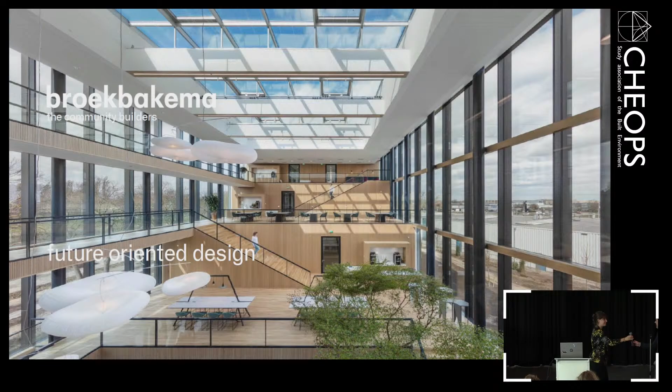Thanks, can you all hear me well? Yes? Hi, welcome, I'm very glad to be back here actually. Once I was a student here, just like you, so I'm really excited to be giving this lunch lecture today.

Today I'm going to talk to you about our office, Broekbakema. We are a Rotterdam-based office, and our motto is that we are the community builders.

Because that's what we like to do. We like to build communities, contribute to the communities in our buildings, and make sure there are enough locations to have social interaction.

And we've been doing that for quite a while. Our office has existed since 1910, and this building you see here is the Van Nelle factory in Rotterdam, our first project. If you look in our archives, project number 1 is the Van Nelle factory, which of course is still there today, and it's a UNESCO World Heritage site.

It's a very exciting building, and our office is actually based now in this building, and we are still the coordinative architect for all the transformations happening inside.

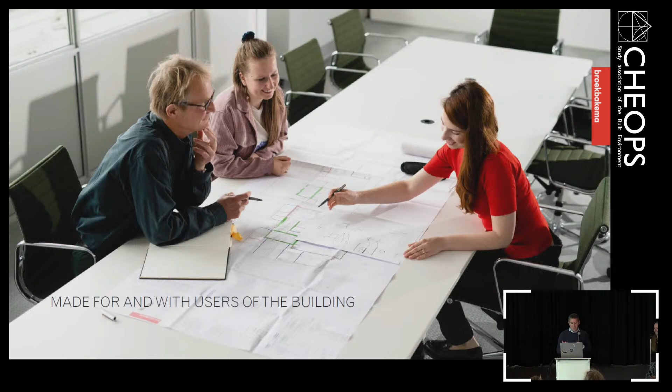Broekbakema, yeah, we like co-creation. We like to work together with our clients to create the building, and what we aim to do is to make great places to work, and by that we especially mean healthy environments for people who work or live there.

And we've been doing that for a variety of clients. So if you come work at us, you can work for a big company, or it can be a monumental zoo like the Blijdorp in Rotterdam, or schools, or all kinds of clients.

But our main fields of work are these four fields: transformation of old buildings, also buildings from our own oeuvre, research and development buildings - we have done a lot of laboratories, clean rooms, production facilities, etc - offices is one of our main things, and education as well.

My name is Ruud van Ginneke. I am project architect at Broekbakema. In total I've been working about 12 years. Before that I was a student here in bouwkunde and architecture as well. I've been working at Broekbakema for about 5 years, and also at some other offices.

Also today with me is Lineke. Lineke is assistant designer at Broekbakema, and has been an intern before that as well. So if after today's lecture you want to know more about internships or how it is to work at Broekbakema, you can ask Lineke or you can ask me.

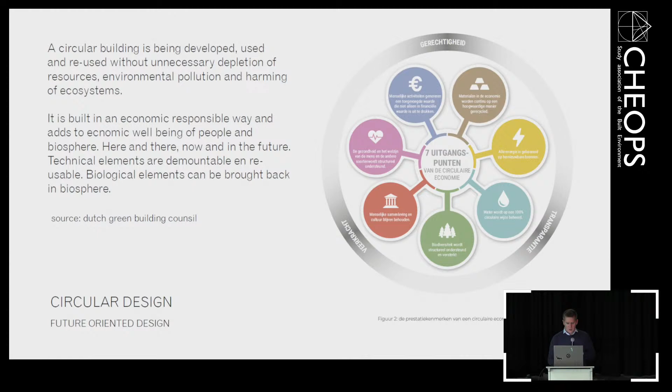If you summarize it, I think what we try to do is to build an environment with buildings that contribute to the well-being of people in the building, and also, of course, to the world, to the biosphere. And we like to design healthy buildings that make people happy and make them perform better.

Yeah, simple as that. That's also how we try to, because you need to find your clients ready to invest in that as well. So it's not only about making nice spaces, it's also about making the people there perform better. It's how we sell it.

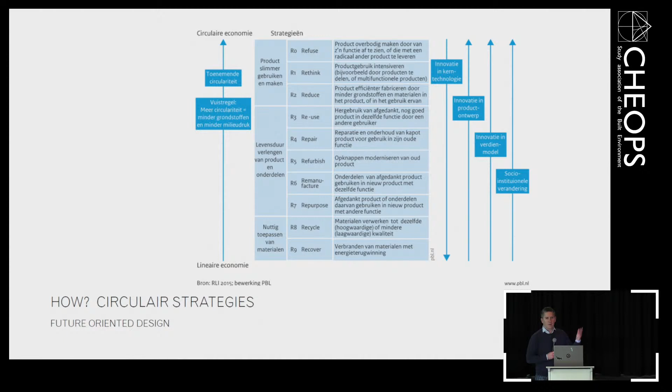Circular strategies - I don't know if you've seen this a thousand times, but the 10R strategy is a standard diagram of strategies for circular design. The higher you go in this diagram, the better the strategy is. For me, it's a very good schedule for circular design, used for product design but also implementable for buildings.

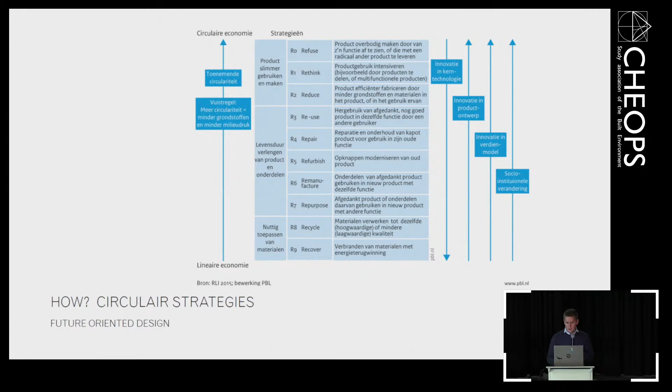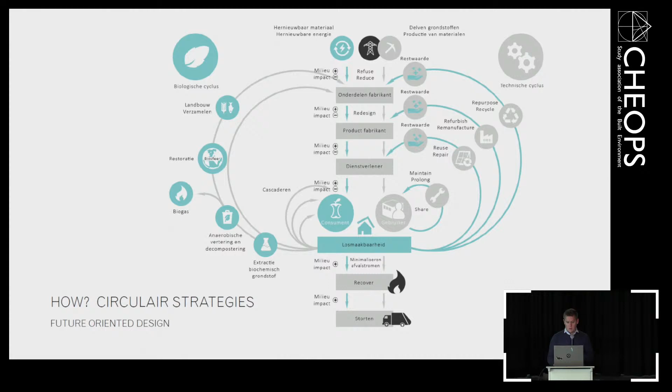The idea is that with these strategies, you can always bring materials back into the cycle of the biosphere or technical sphere. If I were to summarize circular design strategy, the first step is to actually not build anything. If it's possible to reuse your building, do it. To reuse your building or parts of it, you maintain your value, and that's the best way.

If you need to add some value, do it in an adaptive and flexible way. Make sure your building is more future-proof and ready for future changes. Make sure you make your building demountable - this also helps make it future-proof.

That's very important. Circular materials I just talked about, and I'd like to add that I like to aesthetically strive towards timeless architecture, and I think that helps with sustainability too. If you make a building that's easily going to be seen as dated, then it's not sustainable. I think it's done with powerful concepts and subtle shape language.

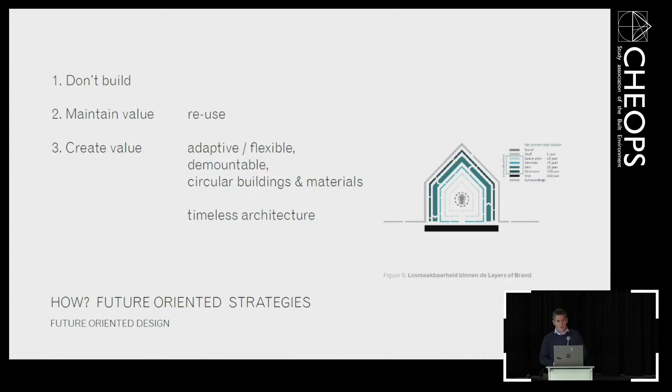Now I want to dive into some projects. I want to briefly talk about two big projects we have done or are busy with - they are showcase projects in terms of sustainable design: the Energy Academy in Groningen and the ABN AMRO Bank in Amsterdam. One is more a showcase for energy, the other for materials. I haven't worked on these two myself, but I don't want to keep them from you.

I want to show it briefly, and then dive a little deeper into the three projects I've worked on myself: the Synthon office in Nijmegen, the KVL leather factory in Oisterwijk, and DSM headquarters in Maastricht. Let's first go to the Energy Academy.

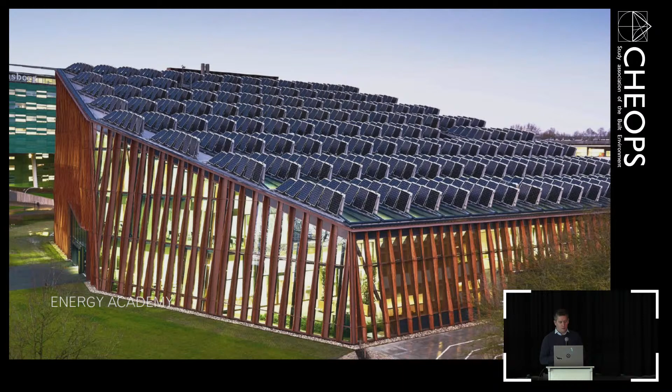This building was done for the University of Groningen. It's a very progressive building, I think, really interesting especially because of the energy management. All the natural resources available have been used optimally here - daylight, the earth, and the air are used.

A good example is the roof that you see here - you see the solar panels, and they are tilted up. In this way, the roof is used optimally for energy, but also to still bring daylight in through the panels.

That's a good example. Another nice example is that there's a labyrinth underneath the building - like a corridor - and the incoming air for the building travels through this corridor, using the temperature of the soil to preheat the air a little in winter and cool it off in summer. I don't have a picture of it, but you can walk through it, and it's literally really cool that they've done it here.

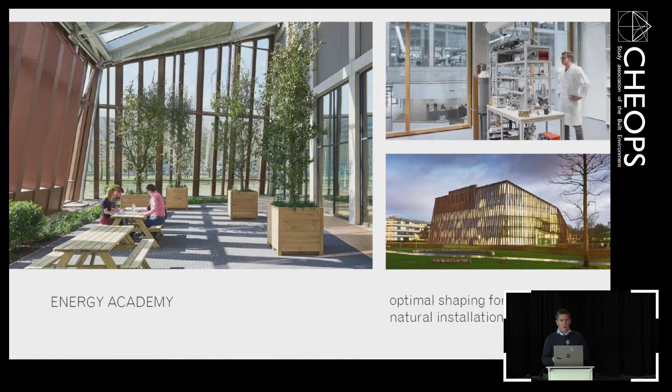So this building, to me, is a showcase for energy - it's optimally shaped for energy as well. The idea of the building is that not so much installations are used, and natural energy is used instead. I think that's really interesting. If you want to see more about the project, you can always visit our website.

This is a project we are working on right now - the ABN AMRO Bank in Amsterdam. It's a really big building, gigantic, almost 100,000 square meters. It's an existing building that we are transforming, so there's a lot of reuse here, and the parts that we add are all bio-based.

I have no pointer, but the white blocks are existing, and the new blocks are all made in wood - you see the images here. So the entire structure will also be all in wood.

This client was also very eager to make a really sustainable building, and a bank, yeah, they have enough money to do it well. So it's a really cool project, and be sure to follow it from our socials.

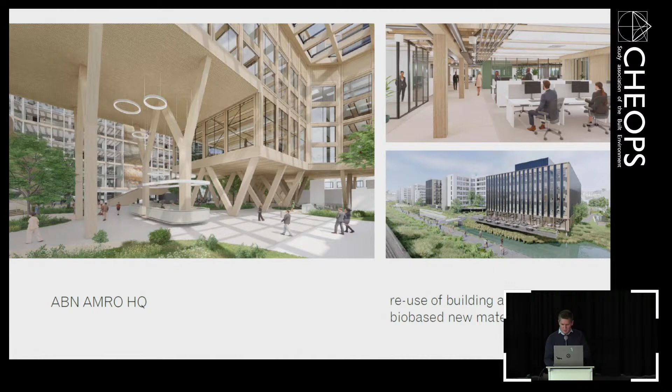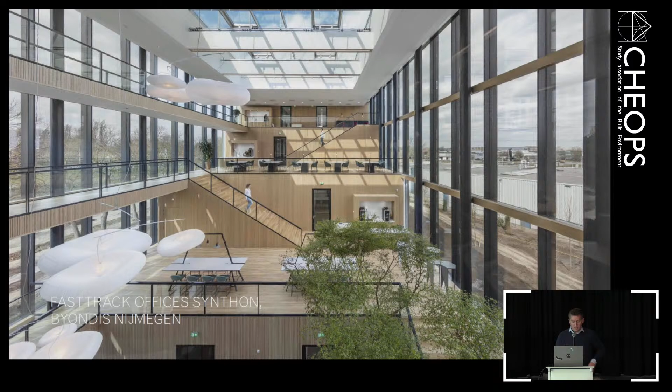Now I want to dive into my own projects that I worked on as project architect. The first one is actually the image you already saw in the beginning: Fasttrack Offices Synthon for Byondis in Nijmegen. Byondis is a biopharmaceutical company. They develop medicines and do research towards cancer.

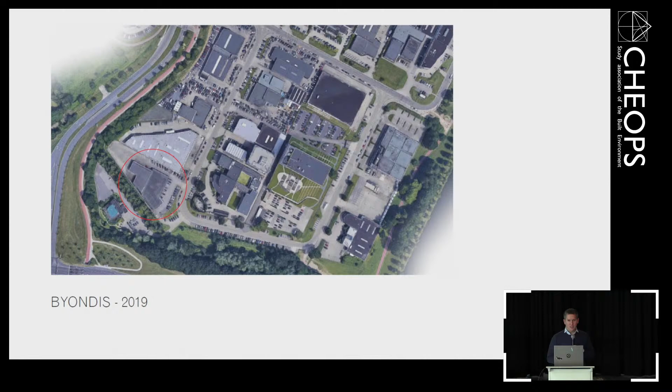We've been doing their urban master plan like a decade ago, and step by step they are evolving, growing and expanding. At the beginning, this area was really like a standard industrial Dutch site, with car dealers, and it was really dodgy and not so nice. Step by step we are making it more and more towards a green campus, and they have bought more and more land. It's actually become a really nice environment.

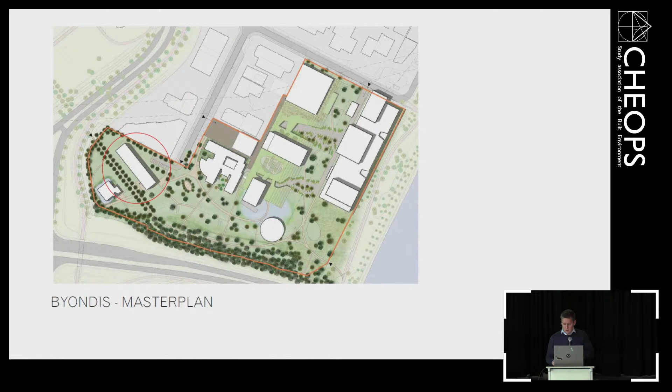Now I'm focusing on the building on the left with the red line around it, which is a new office building. This is the concept of the building.

We said, well, let's make an optimal office block with the right width, so you can have your offices optimally in with daylight, and you still have a good zone in the center for your other supporting functions. And then we cut out the atrium as a central space where you get to meet each other and have your coffee, etc.

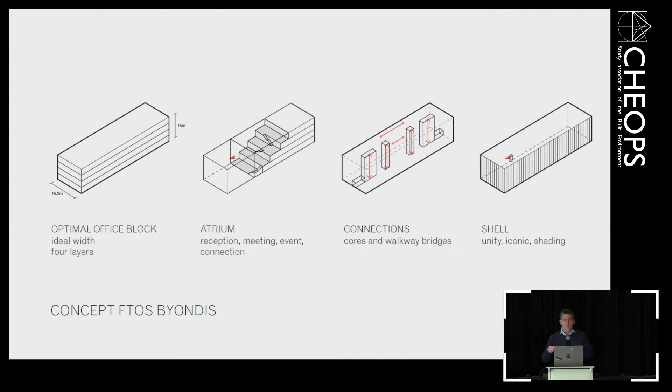We did that in a terraced way, because then you get a nice overview and it looks really cool. Of course, then you make some connections in the building, and also we put the shell around it with the vertical alignment, so it becomes a unity and it's kind of iconic. And of course we made some vertical fins, so we have shading on the building.

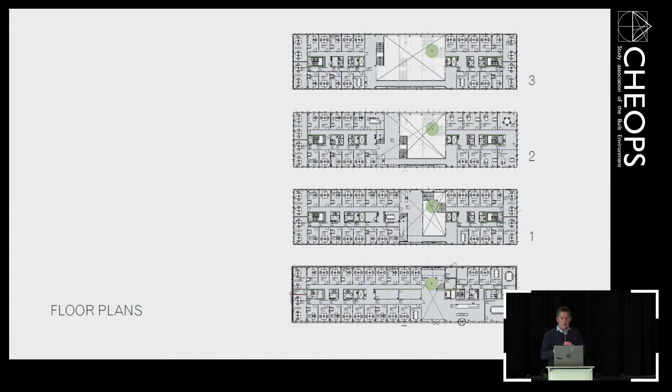This client just wanted office rooms, all rooms. They didn't want an open office with activity-based working. They were a bit more conservative in that, but we made it in a way that you can always change the office layout very easily, so that's still possible in the future.

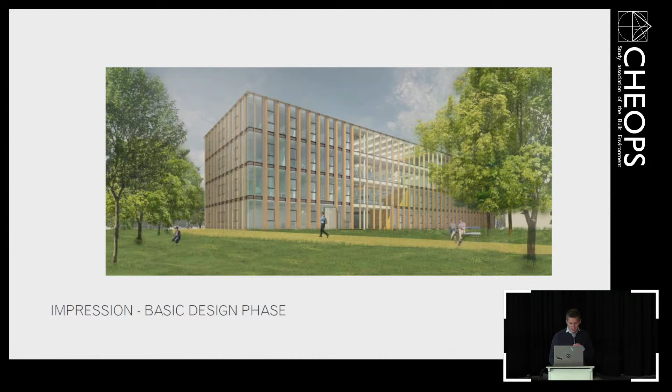This is an impression from the design phase, really quick and dirty done. We had a few weeks for the sketch design, but it's funny to see how it turns out in the end. Also in the sketch design, we did propose, can we make the whole building in a wooden structure, so it's bio-based - and we really believe in that.

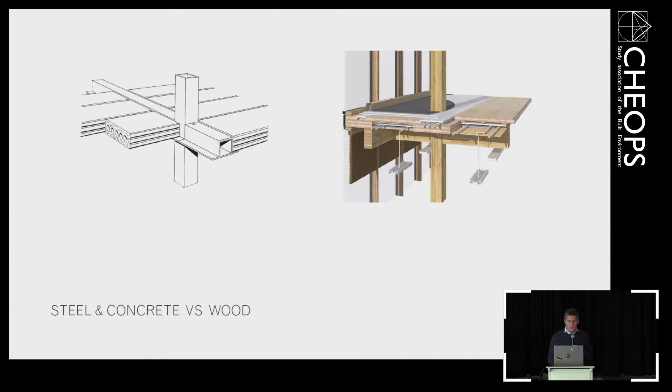But then there's always the alternative of making it in steel and concrete. The basic idea is that the left one is cheaper, but we did visualize it for our client. We tried to say, well, it's interesting, go for wood.

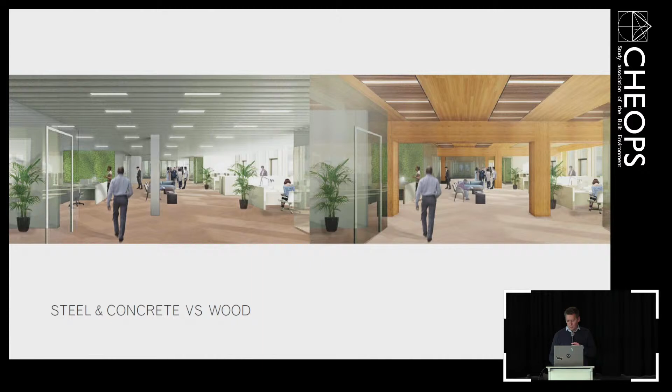If we go for wood, we can make less ceiling because wood is also a material that you can just show. That way we even could calculate that it was almost the same cost, but still the client wanted the high-tech look of the left image. So we weren't able to make a wooden structure, unfortunately. But nonetheless, it still became a very nice building.

Then we said, let's do a lot of wood in the atrium instead. So that's what we did.

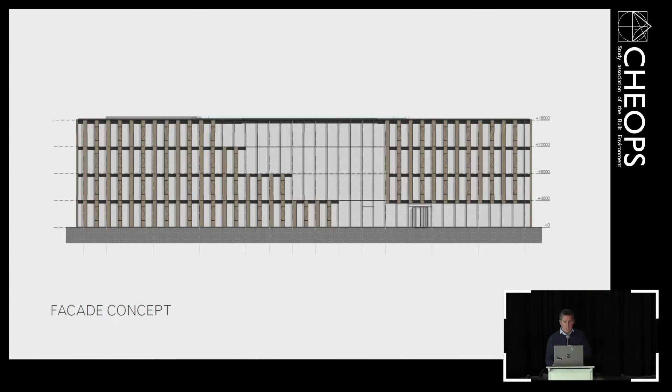For the facade concept, like I said, we have vertical fins, and we have a facade for the offices which has some vertical closed elements, while the atrium is glazed. So in this way, the atrium stands out in a subtle way. This is a detailed drawing of the facade.

I think what's nice about this is that it's a demountable facade. You can see also the fins - that is just within the building structure of the curtain wall facade. And it's really a modular facade, really flexible - every 1.8 meters you can in the future make a new wall towards this facade.

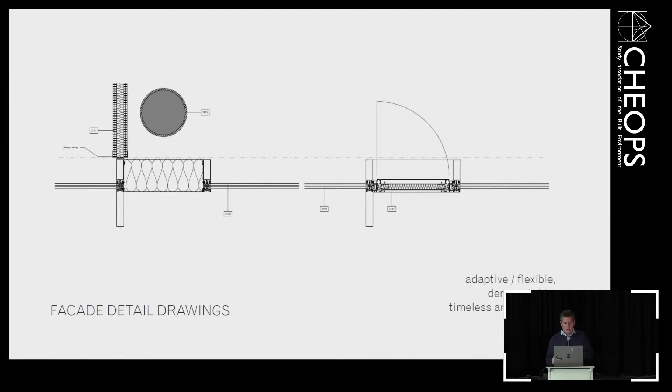We did the openable parts in the closed part of the facade, like you see here. So this really makes a very clean look if you look at the building now - this is how it looks. What I also like about the vertical fins is that if you walk around the building, from one standing point you'll see a very closed facade, like for instance here on the right side, very closed.

And on the left side, you see a more open facade with glazing. From every standing point around the building there's a different look, and it's really nice, I think, dynamic. And this is around the entrance.

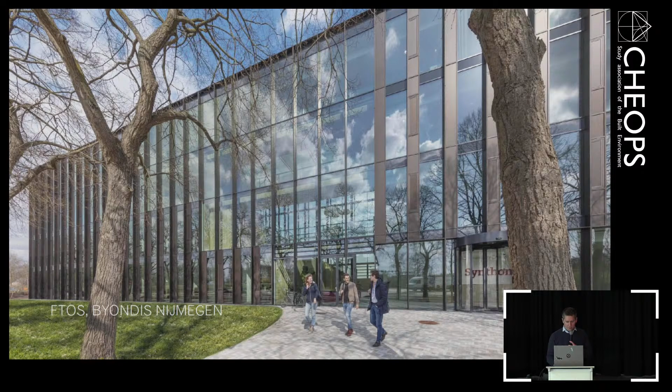So this is how it looks here. You see the shape of the atrium in the glazing. And when you enter, you really get the feeling of a high atrium, the heart of the building where you can meet.

On every floor here, the pantry is also situated. So you are kind of forced, if you want to get your coffee, to go here and you meet other people.

Some research has been done that the places where most meetings take place in offices is always at the coffee machine. So it's really important to design a good place for your coffee machine.

Now on to the next project, the KVL building in Oisterwijk. This is a building you can visit if you want. It's really just been delivered, just been finished, and it's a multifunctional building that consists of an existing part and a new part. So it's a transformation, and it has all kinds of functions in it.

The existing situation was actually really interesting. Oisterwijk is a small town near Tilburg, but it has a big industrial site from the early 20th century, which is the leather factory. It was the biggest leather factory in Europe.

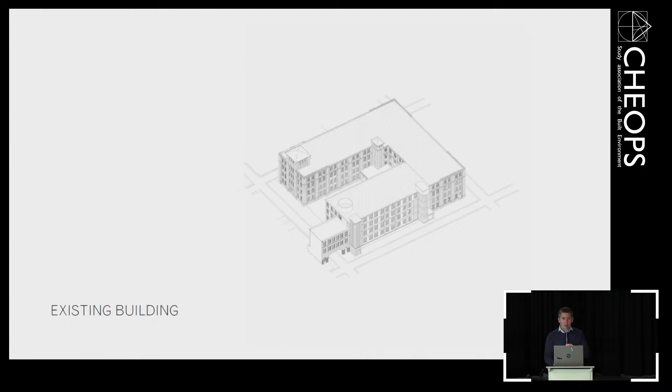And this is kind of the concept of the building. So here we have the existing building. You can see why it's called the U building, because it has a U shape. The idea of the Turkish investor was to demolish one of the branches of the U, marked in red here, and place there the new hotel building.

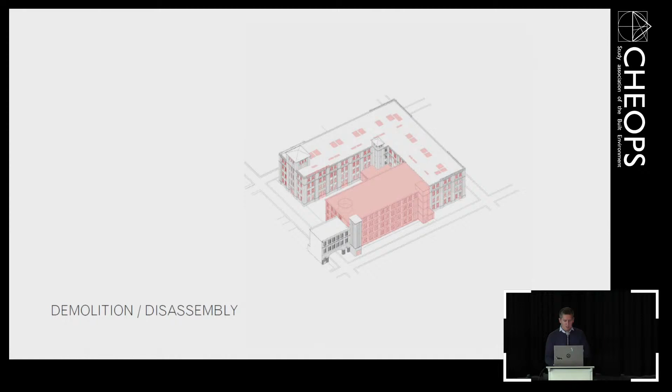So this is actually the concept. You see that the new hotel building is in place. The courtyard in the center gets a new roof.

And in the existing building, it consists of horeca, food courts, restaurants, and then office spaces in two layers above, and the top layer has apartments. And actually also a new top layer on top of what we now call the L building.

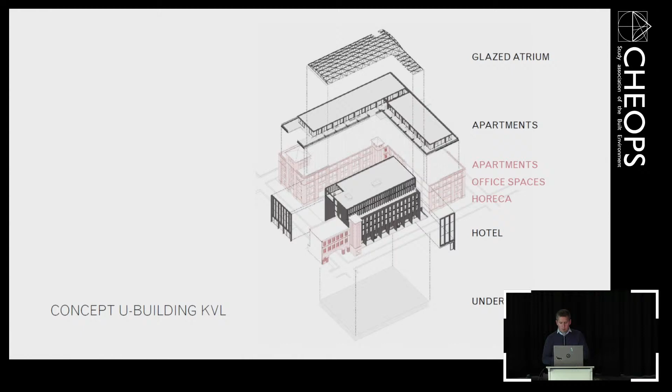Then underneath the atrium and the hotel building, a new parking garage was also being made. So a really multifunctional, interesting concept that we got from this client.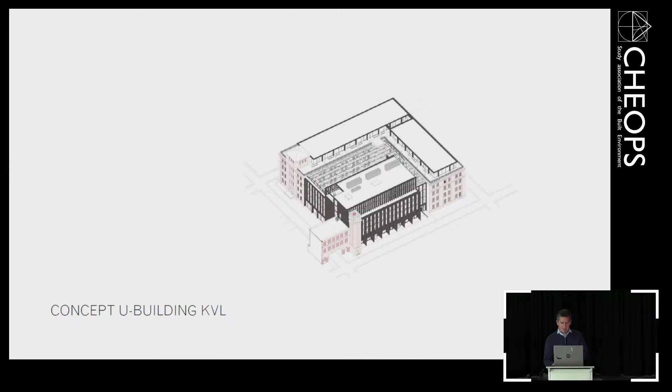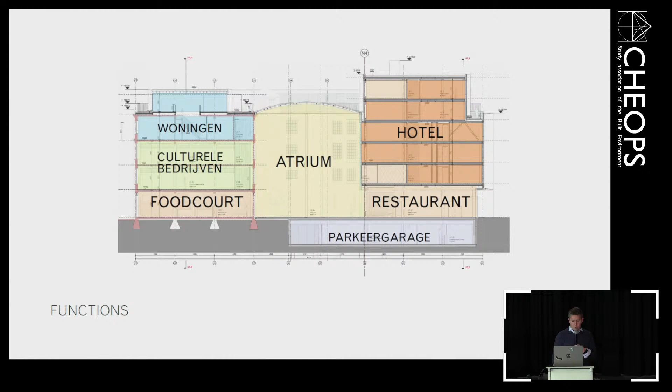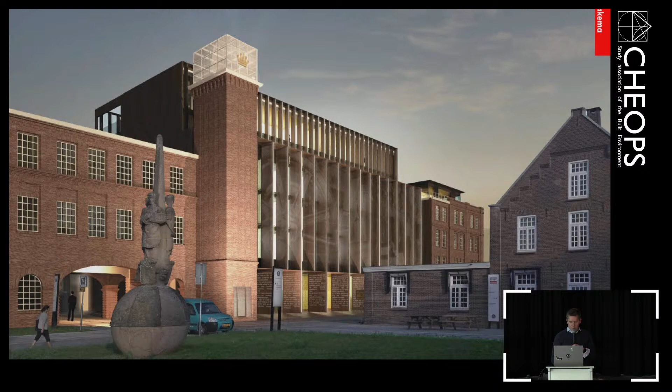Then for the Turkish client, I don't have an image of it, but they also made a sketch design, and they placed a building that looked literally like a book with pages in it—it was really very literal. And we kind of made it more architecture.

We decided to make the book pages more like fins, and shape the fins so it fits in well with the urban context. So we gave the top layers a setback, and we gave the ground floor a plinth with wider fins.

And this is how it looks now.

And we just recently visited the building and are really happy with it. Also, what we tried to do here a little bit was some storytelling about the history of the site, the leather factory.

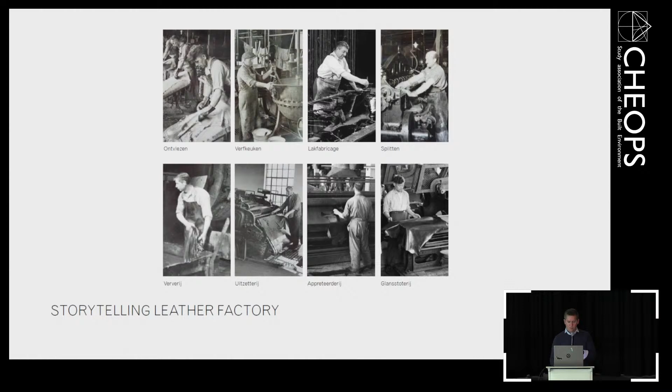Here you see ancient, old pictures of the process in the factory, of all the steps they did, and we used those images, made a perforation pattern from them, and abstractly showed it in the ground floor fins with a perforation of the fins.

It's really not very literal, but if you know it, you see it.

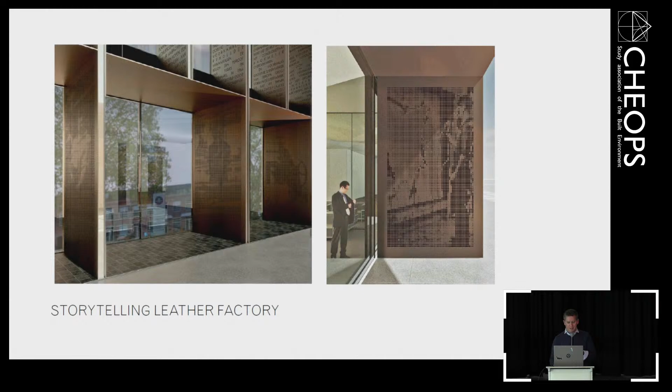And the existing building, we transformed it as well, and all the new bigger elements we added were all in black steel, so it kind of becomes one shape language. The monumental windows that we replaced, we made more sustainable with new glazing, still done in white, like the rest of the KVL buildings.

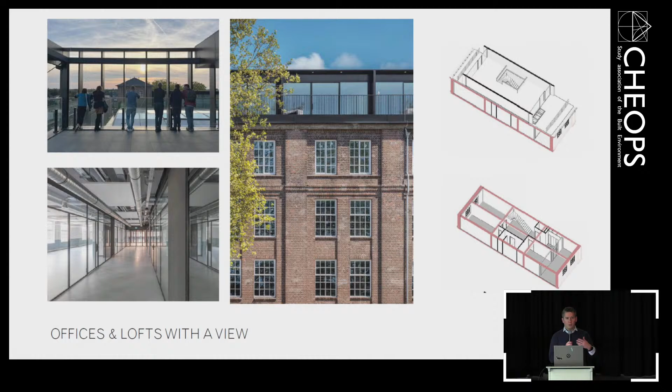And the apartments are also really cool. The top layer of the existing building is where you enter your apartment and have your bedrooms. If you go one layer higher, there's a new layer with only your kitchen and living room, and of course your roof garden with a brilliant view of the surroundings.

Like I said, we recently were there. It's always good to—like we said, we call ourselves community builders. We try to make buildings that contribute to more social gatherings, but we do that within our office as well. So if you finish your project, you need to go there, and in this case we could even have a dinner there and really enjoy ourselves.

In terms of sustainability of this project, it's of course the reuse and update of the existing building. I think it's also good to have this cultural connection and storytelling. We added a new layer as well to the existing building, creating timeless architecture.

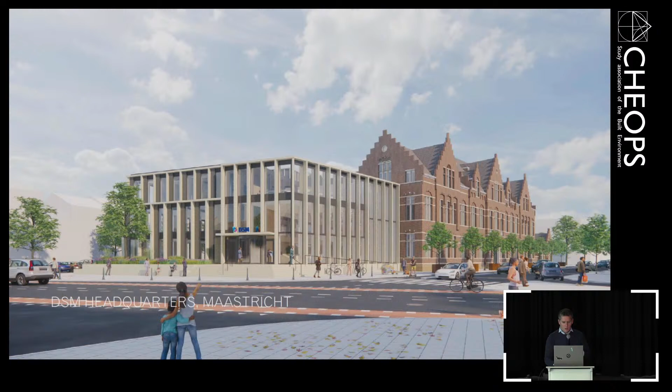I'm going to check—I think I have some time. The final project I want to dive into is the DSM headquarters in Maastricht.

This is not realized yet. At this point, the design is finished, and the existing parts of the existing building have been demolished, and the build has started—last week the first brick was placed.

DSM is a multinational in the Netherlands, and they are moving to Maastricht, to the city center, and this is the building we designed for them. It's a combination of an existing state monument on the right, the former technical school, and a new building on the left, combined together into a new ensemble, placed also on the existing parking garage of the cinema.

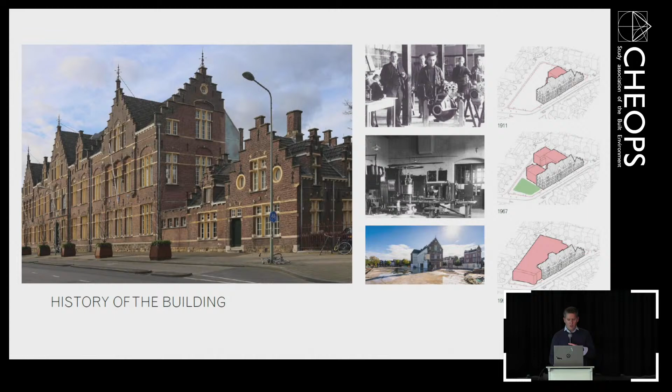Here you see more images of the existing building, from the early 20th century, 1911 I see. Over the years, buildings have been placed behind it and demolished again and placed behind it. In the end it was a cinema, and the cinema is now demolished for the DSM headquarters, but we also reuse the parking garage of the cinema.

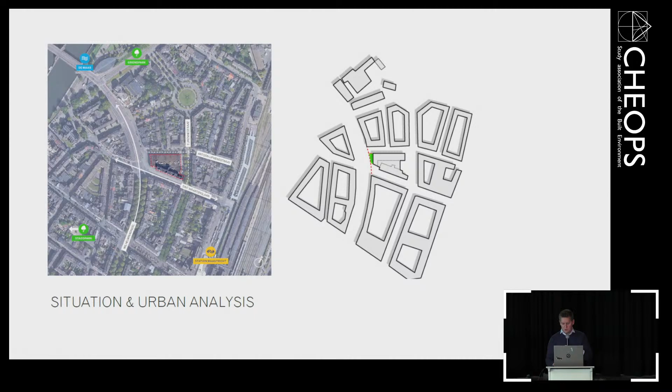If you look at the urban situation, we experienced that the surroundings really have city blocks, and we wanted our building also to be in somewhat the same scale, to create one unity, one ensemble. So even though we have functions really separated—office and atrium in the center—for the way you experience the building from the outside, we want it to read as one unison.

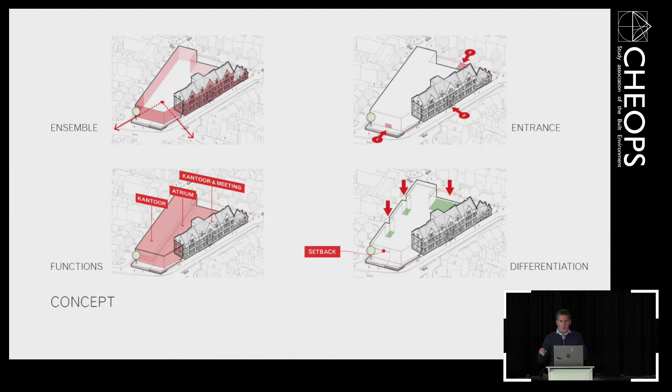You can see that in the schedule on the right underneath. We want to do some things to make a differentiation. So we cut out a green garden from the volume on the back side, and on the more urban front side, we make a nice staircase on the outside, and on the street side we also cut out a few patios to make the urban block a bit more gentle.

The new facade fins are made with microbeton, like a concrete shell with a filling of foam. So it's lightweight, but it still has the stone feel, and it is actually concrete. The color is matched with the stone in the existing facade, and the horizontal lines are also matched with the horizontal lines in the existing facade. In this way, we connect both in a very nice way.

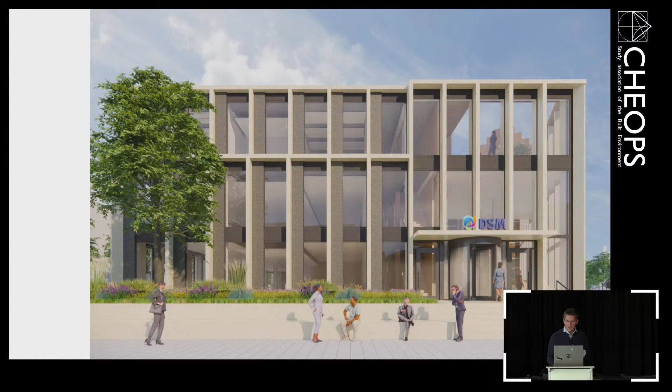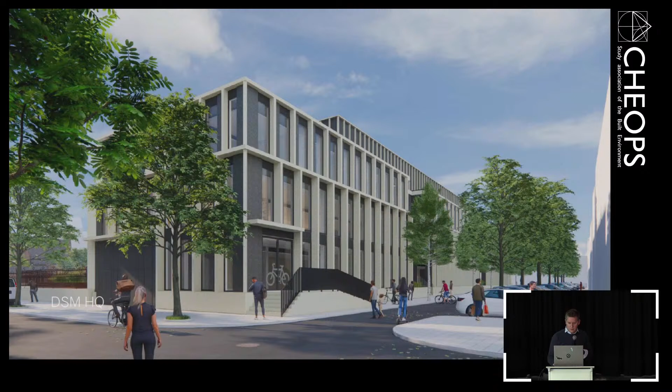If you go around the building, this is the main entrance. And here you see the two different facades - to the right the atrium facade, and to the left the office facade. The office here has a setback, so the top layer is moved a little bit to the back. And here you see the street side with the patios.

This is actually more the back side where we have the bike entrance. On this back side is more of a residential side across it, so here it was really good to make this green garden for the office. And here's also the parking garage entrance.

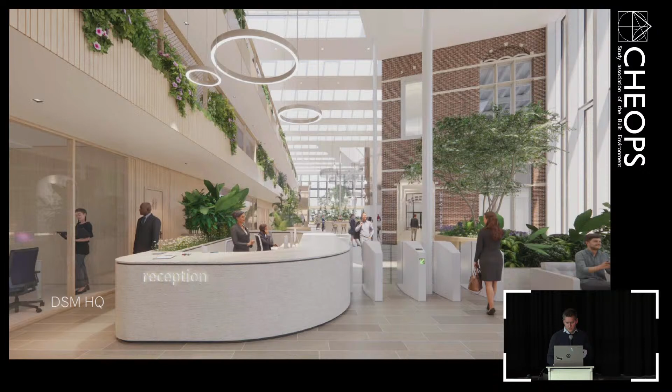If you enter the building as a pedestrian, this is the first thing you see, and I think it really shows nicely the story of the whole building - you see it in one image. On the right, the existing building. On the left, the new building, and in the center, the atrium, connecting everything. It also has the company restaurant in the atrium.

In the existing building, we took out a lot of elements that were not monumental. For instance, on the right side here, there were a lot of lowered ceilings - they looked very ugly, so we took them out, and there's all this brickwork, gewelven. I don't know the English word, but it's really nice to show it again and experience the full height of the monument, as it was before when it was a technical school.

So again, a reuse of a monument, and also an upgrade of the monument. We did insulate it, and we improved it to the current standards.

This building is, like I said, very ambitious for BREEAM and WELL. WELL is actually a label for healthy, to make healthy buildings, and BREEAM is to make sustainable buildings. And Paris Proof is about energy, to make an energy neutral building.

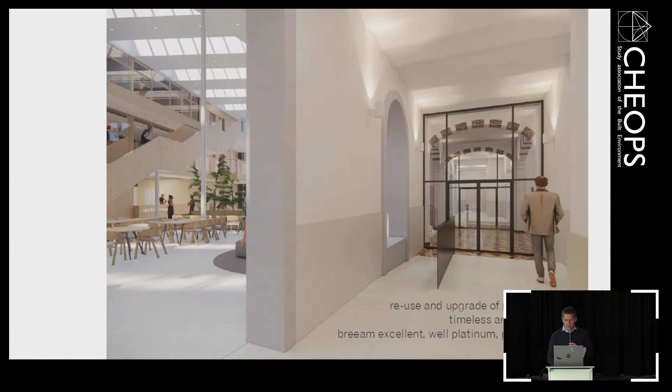So to sum everything up, what we do as Broekbakema, we work in every scale from master plan to interior design. We try to make buildings that are alluring by simplicity, so they look simple and they are appealing. We want to make the buildings light, bring daylight in, make them spacious so you experience a healthy building. We make green a lot in our buildings, like you have seen. So we want to make buildings that are healthy for communities and sustainable for the world.

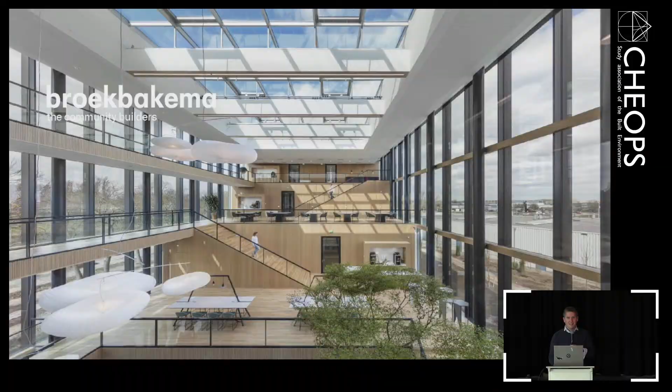Are there any questions? Don't hesitate. No questions at all? Okay.

I'm wondering how many people here are interested in becoming an architect? Could you show some hands? Yeah, quite a lot. Okay, okay. All right, all right. I don't have to convince you that it's a very nice profession then. That's already clear. Okay, thanks.